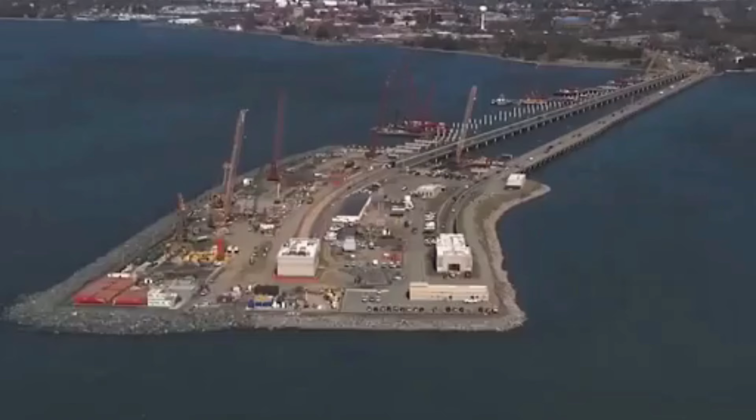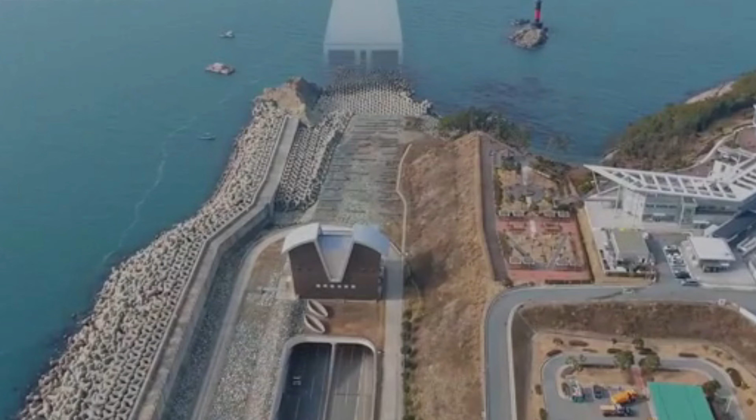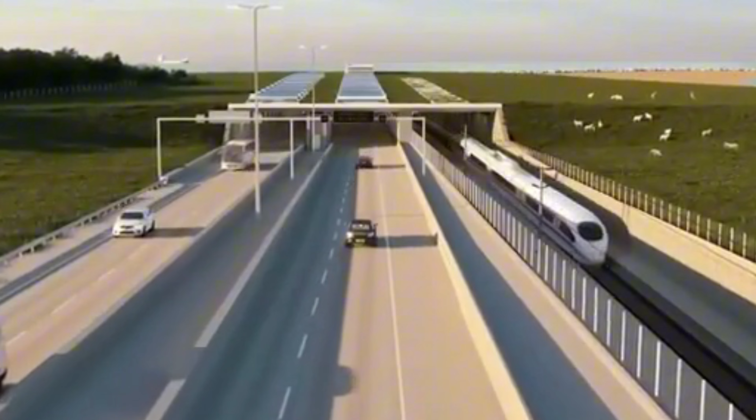40 meters beneath the ocean, 76,000 tons of concrete are being lowered into total darkness. A mistake of just a few millimeters and 3,000 workers would drown instantly. But when you discover what they were building down there and why, you'll understand why American engineers called it technically impossible. Decades ago, China couldn't even build a decent bridge without foreign help.

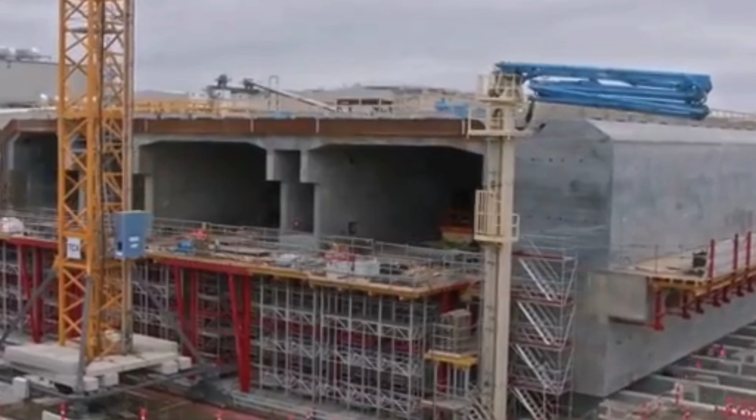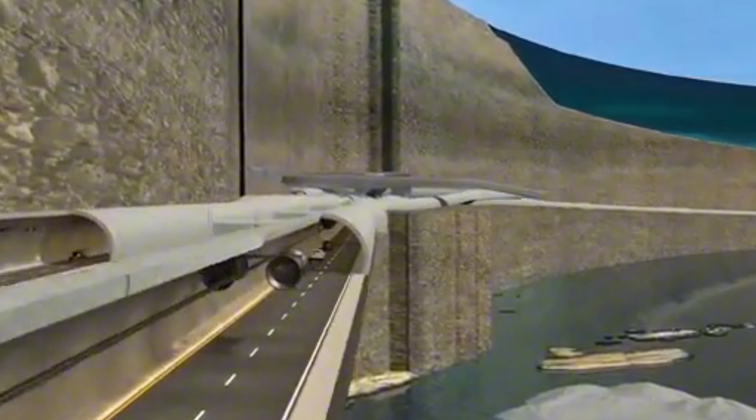Engineers around the world laughed when the Chinese spoke about megaprojects. But something changed, something radical. Today, while developed countries debate budgets to repair highways, China is building underwater tunnels so deep they seem to break the laws of physics. Bridges so long they can be seen from space. Rail networks so vast they surpass the rest of the world combined. And the most astonishing part, they're building all of this in months, not decades.

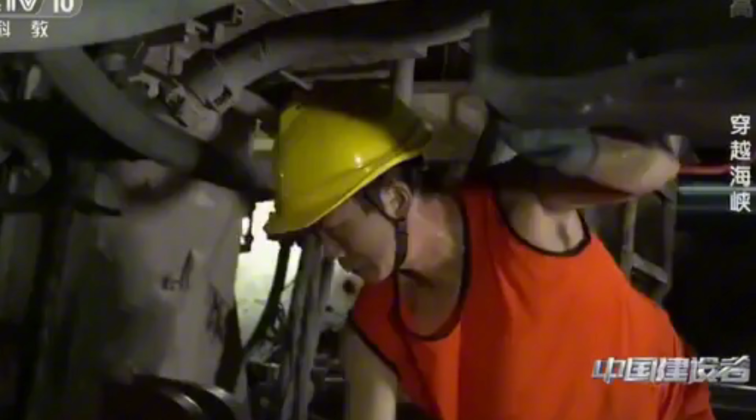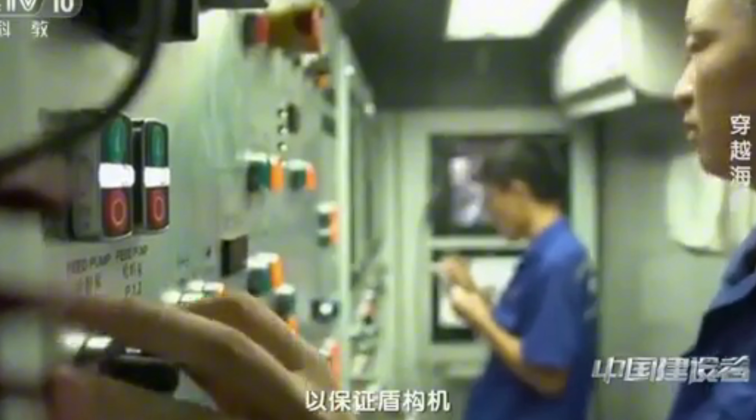How did a nation that once had to copy basic technology transform into the greatest infrastructure giant humanity has ever seen? The answer will challenge everything you think you know about modern engineering. There's an old Chinese saying that explains this obsession with infrastructure. If you want to get rich, build roads first. It sounds simple, but it holds a brutal truth about economic development. Transportation isn't a luxury. It's the backbone of any civilization that wants to prosper.

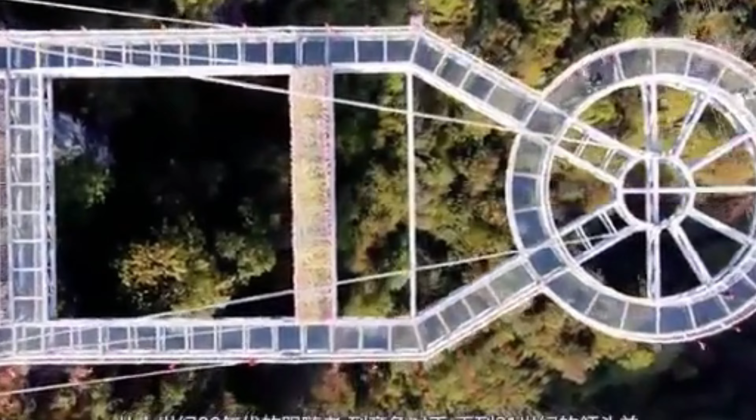People and goods must move. Without that, the economy stops, and China understood this better than any other nation in modern history. While Western powers were debating environmental impact reports, China was building the future, and the numbers are staggering. In just one decade, China built and put into operation 45,000 kilometers of high-speed rail. Japan and Europe, pioneers of this technology, took 3 times longer to develop their networks. And even then, their scale is only a fraction of what China has achieved.

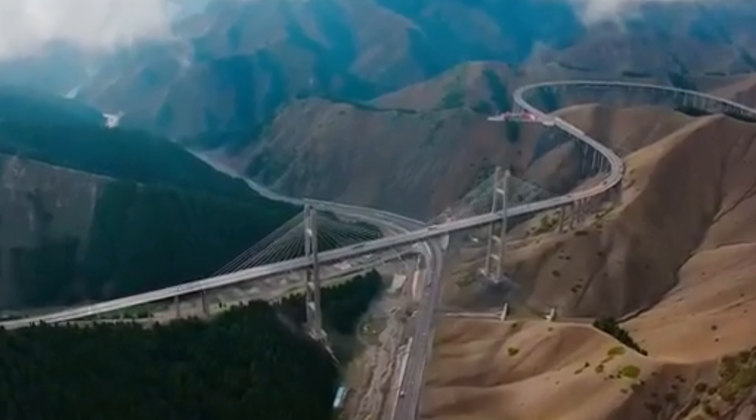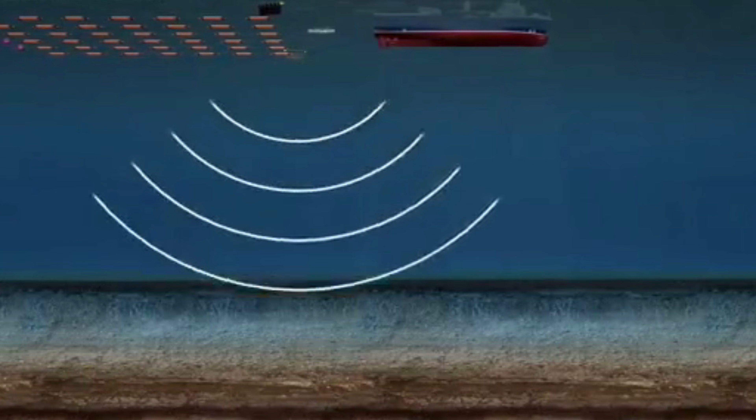Today, China's high-speed rail network alone surpasses all other countries in the world combined. But it's not just about quantity, it's about revolutionary quality. China didn't just copy foreign technology, it mastered it, perfected it, and now leads the 4.0 era of high-speed trains. Speeds once considered theoretically impossible are now routine. While developed nations struggle to maintain their aging railways, China is redefining what land transportation means.

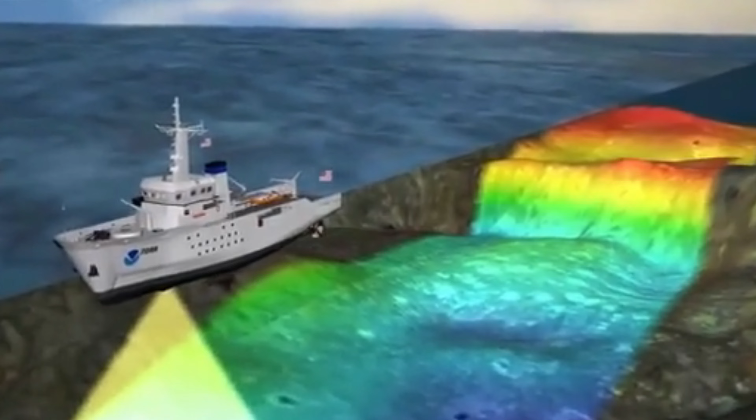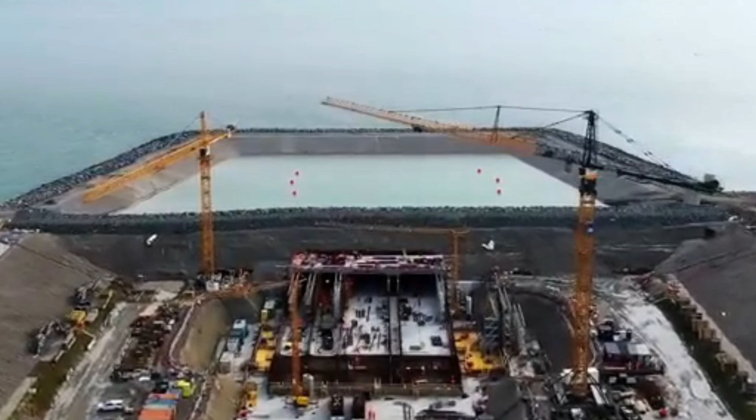Railways already impress, but bridges that connect entire islands to the mainland prepare for visual impact. From space, you're about to witness one of the most daring feats of engineering ever conceived, the Xihoumen Bridge, the world's largest island-to-mainland connection. Its main span of 1,650 meters leaps across the ocean in a single stretch. For 10 consecutive years, it held the record as China's longest span bridge. But that's only the beginning.

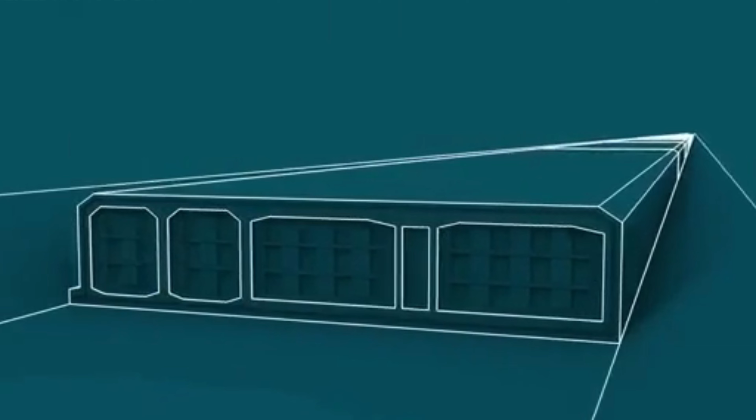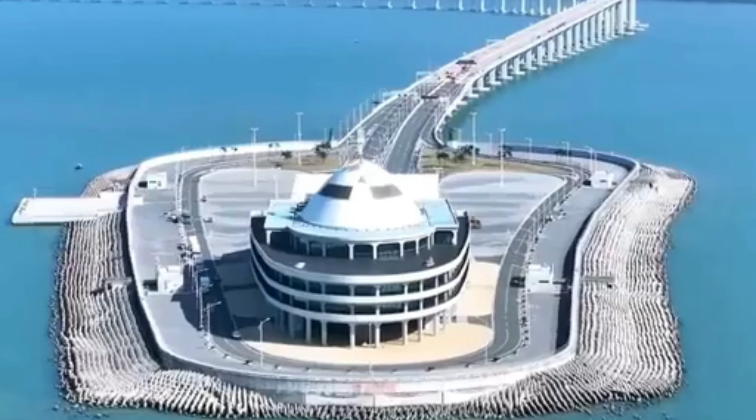Along with the Jintang, Taoyaomen, Xiangjiaomen, and Cengang bridges, a chain of mega-bridges extends nearly 50 kilometers, uniting once isolated islands into a continuous territory. 9 years later came the Yushan Bridge, 8 kilometers long, connecting Yushan Island to Daishan Island. 12 years later, the Zhoushan-Daishan Bridge, 25 kilometers long, linked Daishan to Zhoushan, the main island.

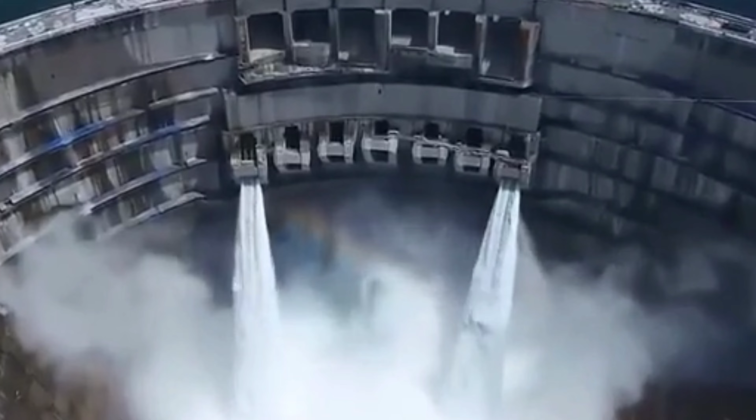Add to that the Donghai Bridge, stretching 32.5 kilometers and connecting Shanghai to Yangshan Island, and the Liuheng Road Bridge still under construction. The result, China gained the busiest cargo port in the world, the second largest offshore green petrochemical base, and its first major fishing territory. This isn't simply a bridge, it's a super connection that reshaped China's coastline and redefined what's possible in modern engineering. But if you think bridges over the sea are impressive, wait until you see what they're building under the ocean.

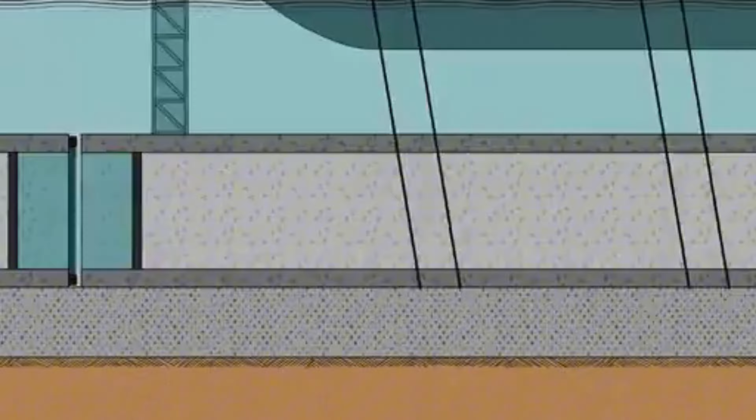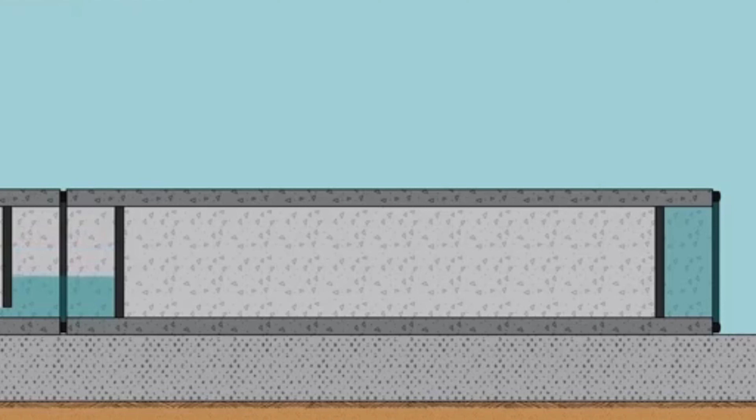After mastering ocean-spanning bridges, China aimed for an even greater challenge: high-speed rail tunnels beneath the sea. Welcome to the Jintang Undersea Tunnel, 16.18 kilometers in total length, with 11.21 kilometers excavated beneath the seabed. Its cross-section measures 14.5 meters in diameter, as tall as a 5-story building, large enough to hold dual high-speed train tracks. Construction depends on a colossal tunnel boring machine called Dinghai.

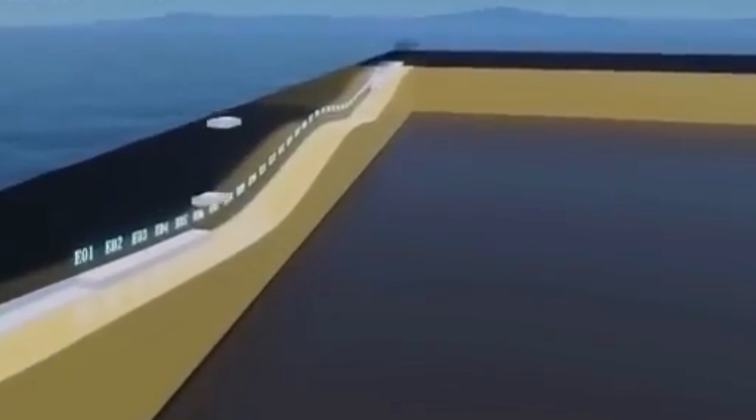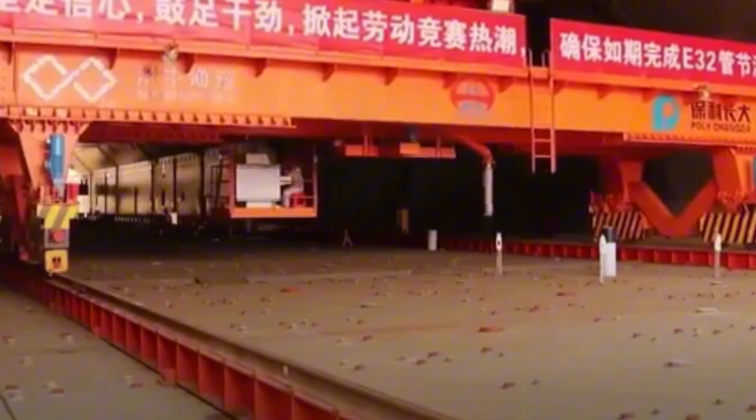Its cutter head is nearly 15 meters in diameter, with steel blades that act like the fangs of a giant beast, slicing through layers of rock and soil. Guided with millimeter precision by China's Beidou satellite navigation system, it advances toward another machine, Yongzhou, coming from the opposite direction. Deep under the seabed, the two machines finally meet with a precision of just a few millimeters.

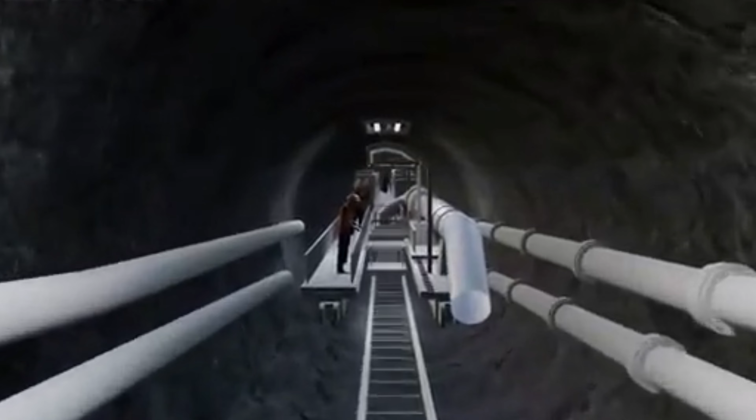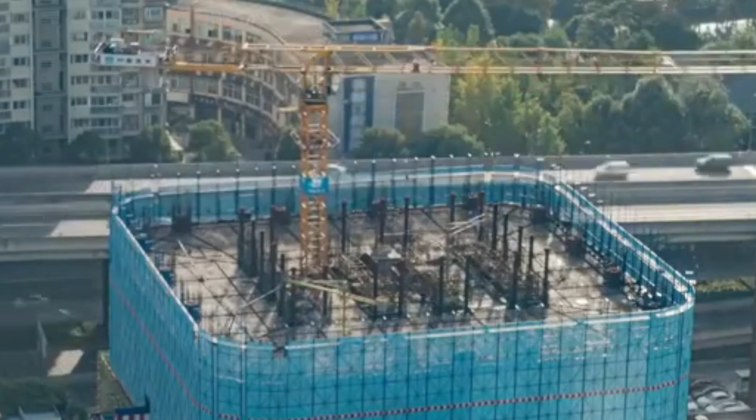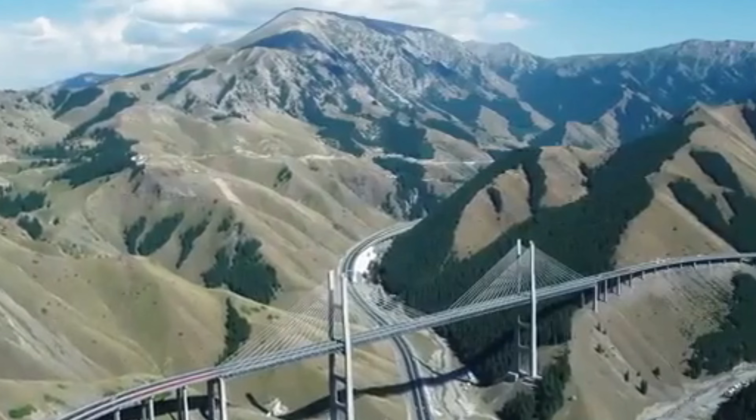The tunnel runs 78 meters below sea level, where the boring machines must withstand monstrous water pressure. And precision is everything. In an undersea tunnel, even the smallest manual measurement error multiplies with distance. A miscalculation, and you end up with two separate tunnels instead of one. To prevent disaster, engineers deployed 6 Beidou satellites connected to the machine's automatic navigation systems, correcting deviations in real time. In the end, the alignment error was kept within just 2 centimeters.

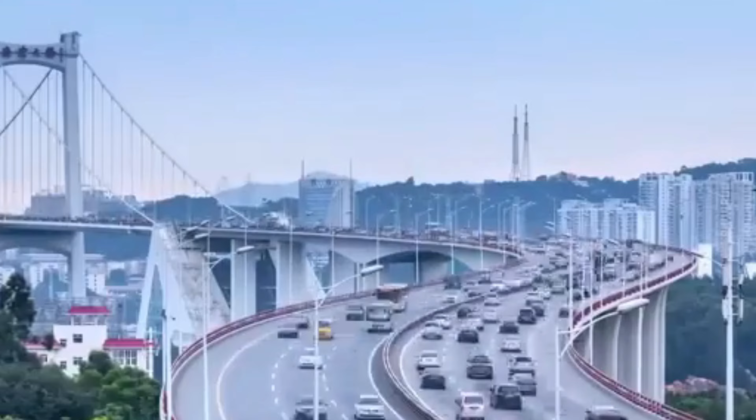Then came the final challenge: how to remove the machines. When two titans meet underground, there's no exit ahead and no way back. The solution: a technique called peeling the shell. The tunnel boring machines are dismantled piece by piece and removed while their massive steel casings remain inside the tunnel, permanently reinforcing its structure.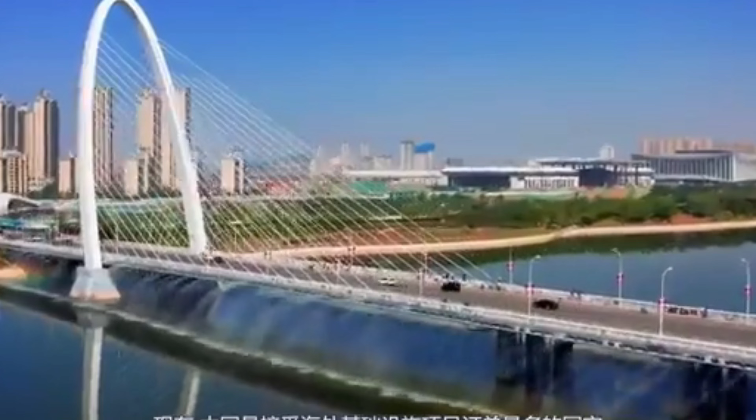According to the schedule, the Jintang undersea tunnel will be fully excavated by the end of 2026 and open to traffic with the Zhoushan-Ningbo Railway in 2028. Once complete, passengers will travel from Ningbo to Zhoushan in just 30 minutes by high-speed train, ending the island's long history of isolation.

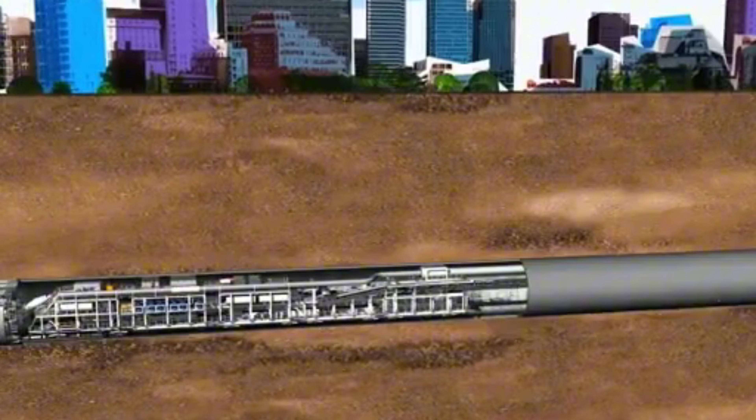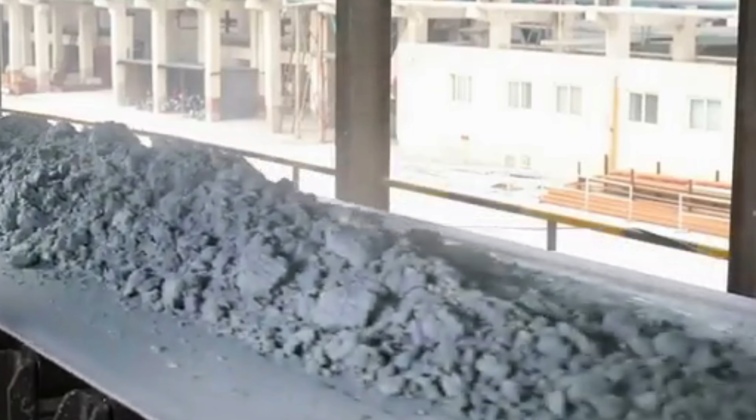High-speed undersea tunnels are already otherworldly, but building tunnels 40 meters below the ocean using 76,000-ton concrete tubes defies gravity itself. Here's the billion-dollar question. The ocean is full of water, so how do you build a tunnel beneath the seabed? And how did Chinese engineers manage to construct a 6.7-kilometer undersea tunnel 40 meters deep?

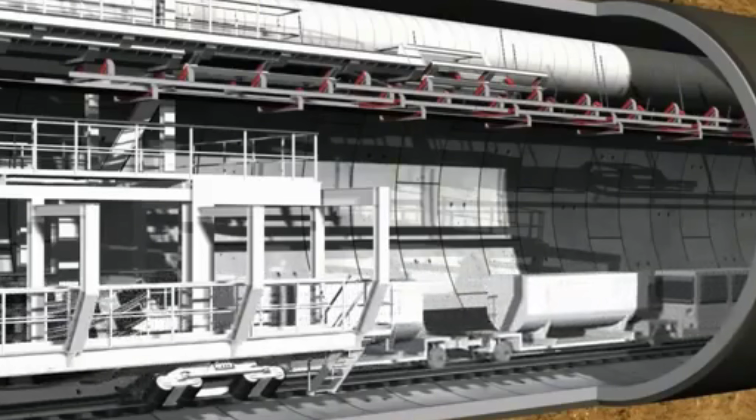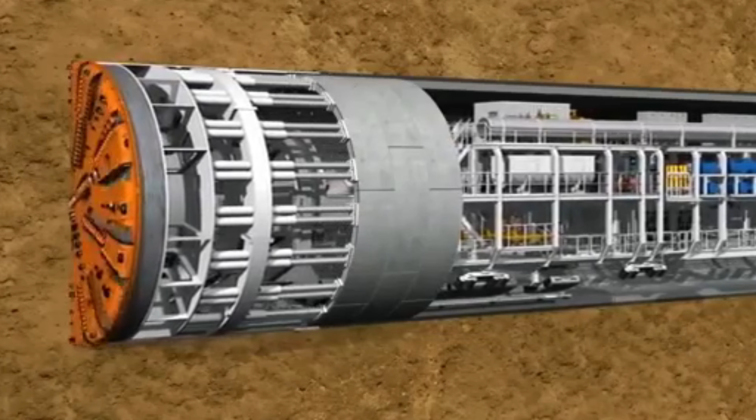At first, engineers considered using tunnel boring machines, but since these require extreme stability, the tunnels they dug would have been much deeper than required. They needed another solution. The goal: build a massive ocean bridge connecting Hong Kong, Zhuhai, and Macau, a project now hailed as one of the 7 wonders of the modern world. The final solution was immersed tube technology.

In this method, trenches are dredged into the seabed. Prefabricated concrete tunnel sections called immersed tubes are lowered into these trenches, aligned underwater, joined together, and finally covered with sand and gravel. Each tunnel section is 180 meters long and weighs 76,000 tons, roughly the same as an aircraft carrier. Each contains 2 3-lane roadways and 2 service tunnels.

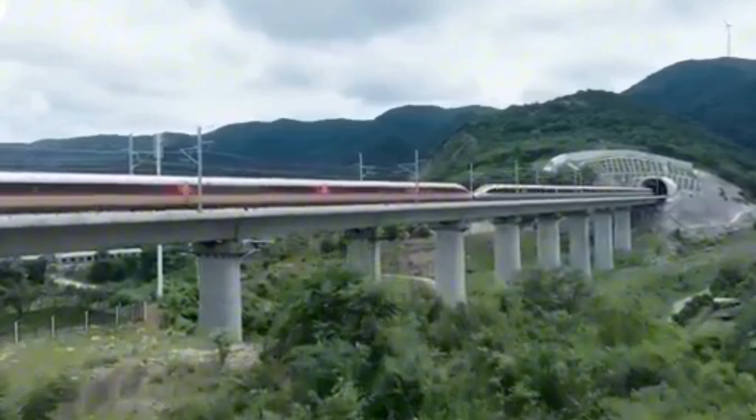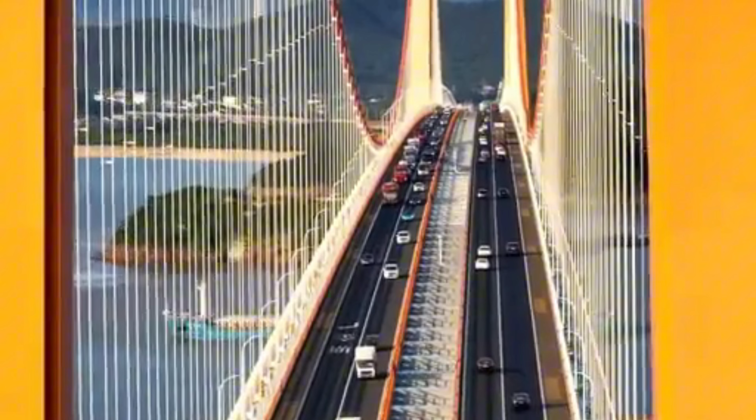Chinese engineers had to lower and align these massive tubes one by one, but fabricating a single 180-meter-long, 76,000-ton reinforced concrete unit was almost impossible. The solution: divide each section into 8 smaller parts, prefabricate them in a factory, and then assemble them into one complete 180-meter unit. On the uninhabited Niutou Island, more than 3,000 workers built a massive factory in just 100 days.

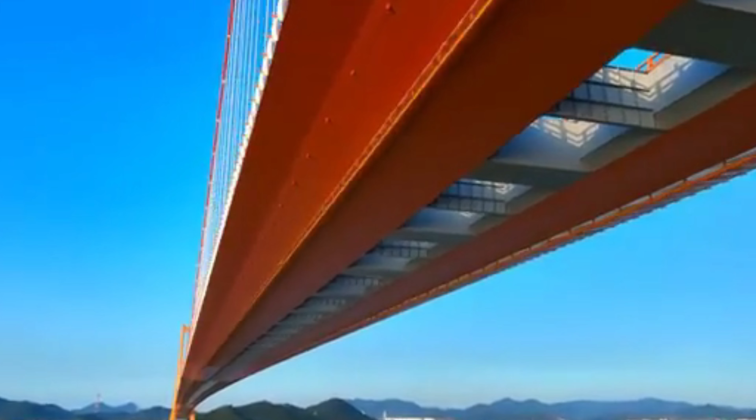Its only purpose: to produce the 33 immersed tubes required at a rate of 2 per month, each weighing 76,000 tons. After more than 400 days of construction, almost all tunnel sections were in place. Once the final segment was sealed, the Hong Kong-Zhuhai-Macau Bridge undersea tunnel, which stunned the world, was complete.

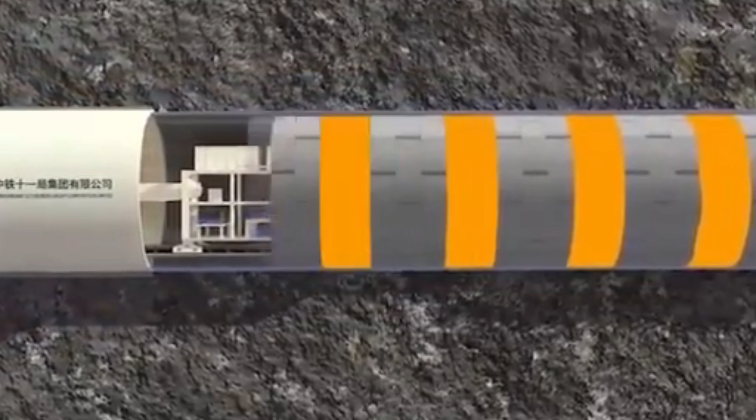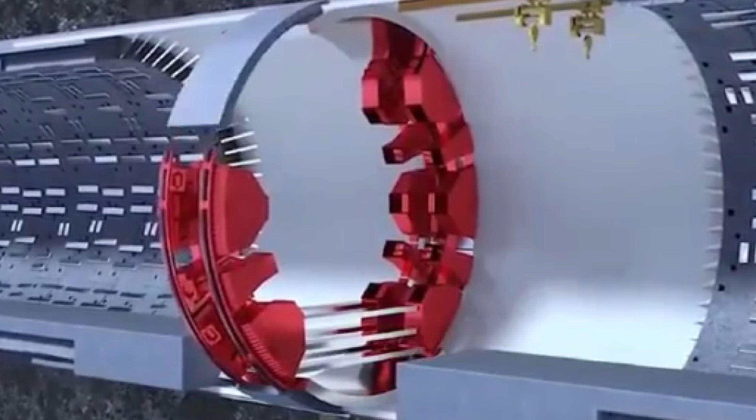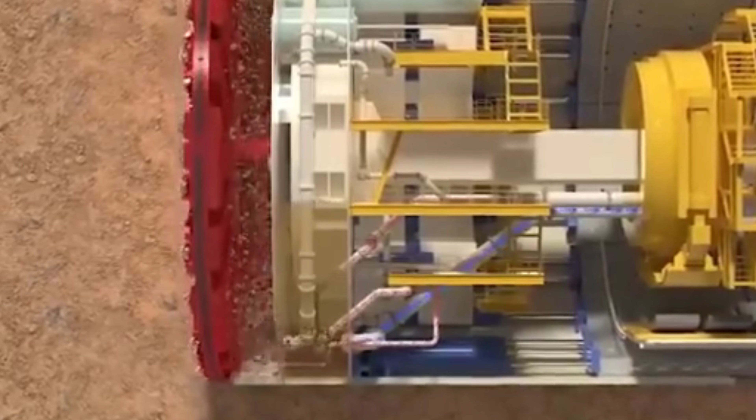From ocean bridges to undersea tunnels, from vast high-speed rail networks to colossal hydroelectric projects, China continues to redefine the limits of human engineering. These aren't just structures of steel and concrete. They're symbols of ambition, vision, and determination. Of course, such projects spark global debate. Some marvel at China's speed and precision. Others question the social and environmental costs.

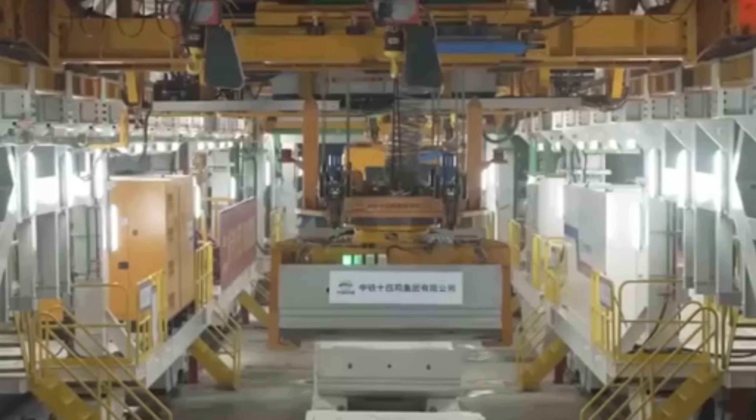But one thing is undeniable: China has shown the world that the future isn't something you wait for, it's something you build. So what do you think? Are China's megaprojects a new chapter in human civilization, or a massive gamble that could backfire?

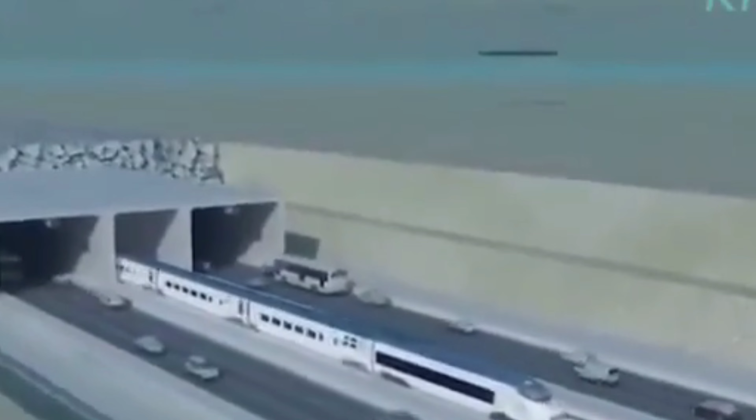China has repeatedly pushed the boundaries of human engineering. These projects aren't just transforming China, they're reshaping the world.